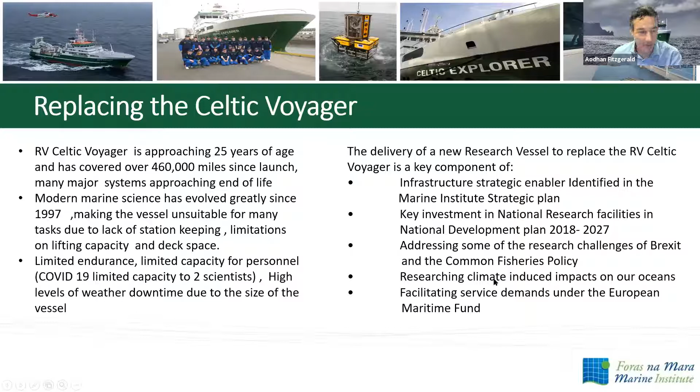So the project timeline. We received confirmation of funding from DAFM, our parent department, in 2018. We ran a procurement process and awarded a design tender to Skipsteknisk Design from Norway in January 2019. Got to work immediately, and we had a basic design completed by the middle of 2019. That helped us issue a tender for the construction of the vessel in 2019. We then began a detailed design process in July 2019, including looking at the energy efficiency aspects. There was a contract for vessel construction awarded to Astilleros Armon in Vigo in December 2019. Equipment procurement and further detailed design work began very early in the new year in 2020.

Steel cutting commenced then in August 2020, and the keel was laid in November 2020, all on track despite the extreme challenges of the pandemic. The vessel is to be launched on the 19th of November, this Friday, in Vigo, 2021, and the vessel delivery is planned for Q3 2022. So we're delighted that the vessel is going to be floating finally on this Friday.

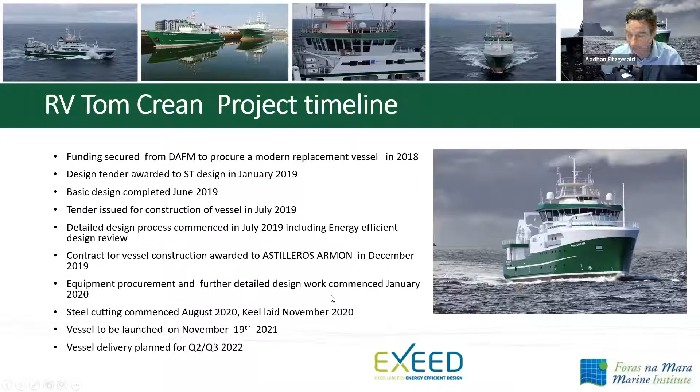So the outline initial design was for a diesel electric vessel with 2 generators, roughly 3 megawatts in capacity, burning ultra low sulfur marine gas oil, 52.8 meters in length. Vessel to be designed to meet the requirements of the ICES 209 curve for underwater radiated noise. Accommodation for 12 crew and 14 scientists, with an endurance of 21 days and capabilities in the areas of fisheries research, oceanography, hydrography, geology, ROV deployment, and buoy deployment and servicing.

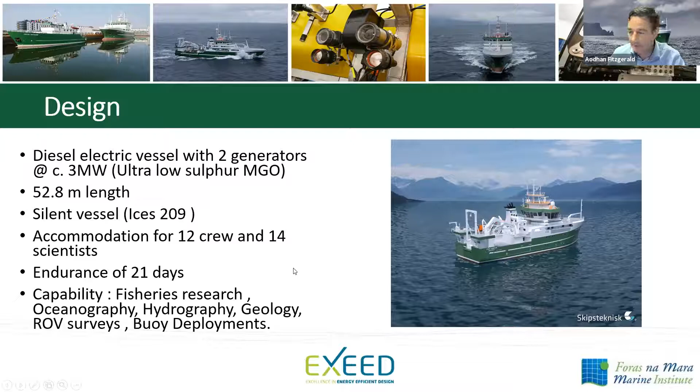So the final design we ended up with, the length overall didn't change. The beam ended up at 14 meters, gross tonnage of just over 1,900 tons. It's classified by Lloyd's. It's got an ice class 1C, which is quite a relatively heavy ice class compared to the previous vessel. It's got DP1, up to 26 people. It's got Mitsubishi high-speed engines. It's got a separate harbour genset. It's obviously one single electric motor driving a single propeller. It's a 7-bladed propeller to help with the silence of the vessel. It's got a 700 odd kilowatt bow thruster as well as a stern thruster.

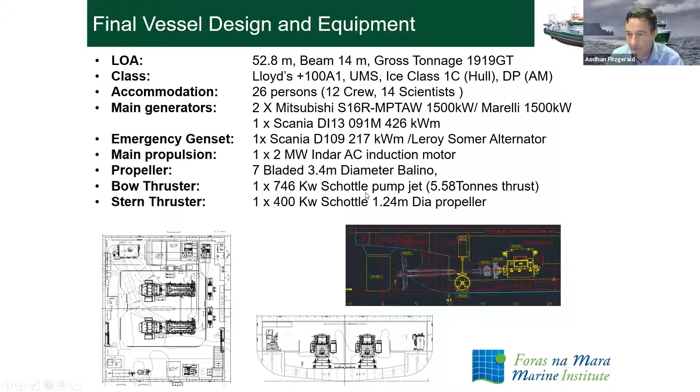In terms of the acoustic surveying equipment, it has two multi-beams at the moment: one dual RX 2040 on a retraction unit forward of the drop keel, with a second backup 2040 on the drop keel. Our experience from the Celtic Explorer is that having a multi-beam 9 meters down on a drop keel gives the ability to work in very high sea states.

There's also provision for a more deep water EM 710 on the hull, just forward of the 2040. There's a sub-bottom profiler, a Knudsen 3.5 and 12 kilohertz unit, hull mounted. There's a fisheries echo sounder on the drop keel with 5 frequencies, an EK80 system. There's a long-range fisheries sonar SU93, an ADCP fitted here, a 45 kilohertz Pinnacle unit, and the ability to fit a 150 kilohertz as well.

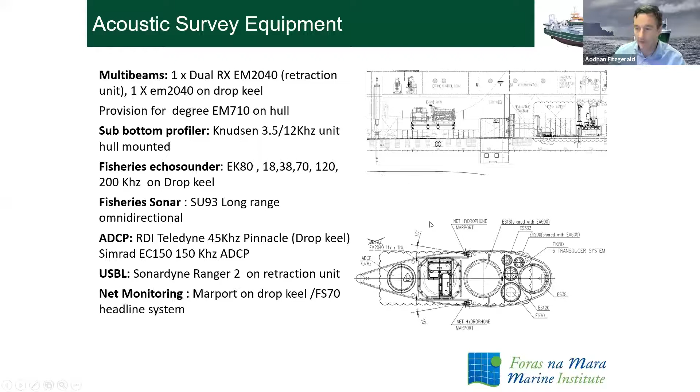It's got a permanent Sonardyne Ranger 2 USBL on a retraction unit just aft of the drop keel, and it's also got net monitoring capabilities using Marport hydrophones in the drop keel.

In terms of oceanographic equipment, we have a 24 bottle CTD unit with 4,000 meters of wire on an active heave compensated winch from a dedicated launch and recovery unit. It's got the usual underway temperature, salinity, PCO2, and other water sampling in the bow, and also has a bow met mast for meteorological work.

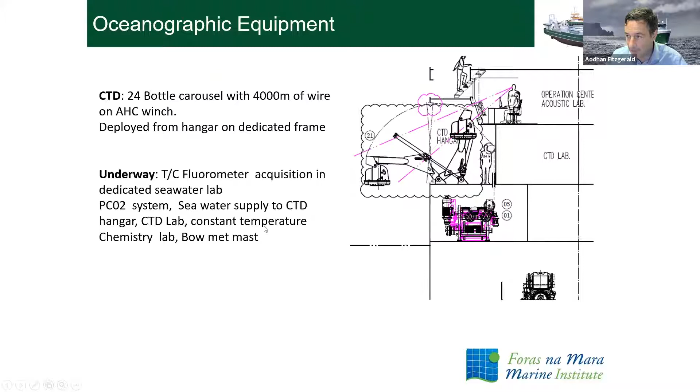In terms of coring and sampling, it has an 8-ton T-frame on the starboard side, which can operate up to 4,000 meters of 14mm Dynex, ideal for piston and gravity coring up to 12 meters in length, and box coring. There's also a hydrographic winch for day grabs and smaller sampling devices.

There's an oceanographic winch with 2,500 meters of coax, multi-purpose for either towing oceanographic equipment, multi-nets, or side scan deployments. It has a 10-ton A-frame, set up for likes of vibrocoring, CPT work, and operating a camera sled. It also has a moving vessel profiler on the port gantry.

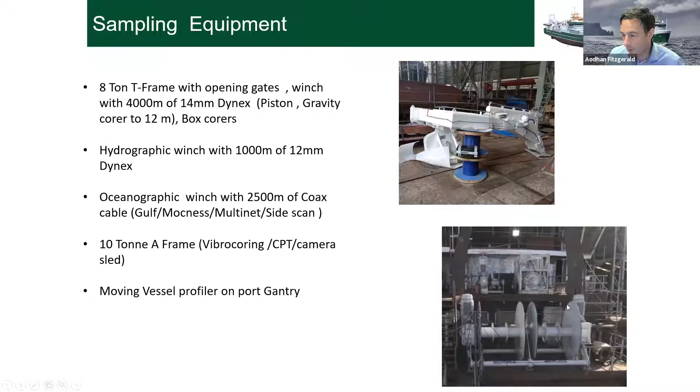So we mentioned it can take up to 14 scientists, equipped with the usual stuff, a gym, which is a big improvement on the Celtic Voyager. It's got good recreational areas, a shore generator for fuel efficiency, and all electric winches.

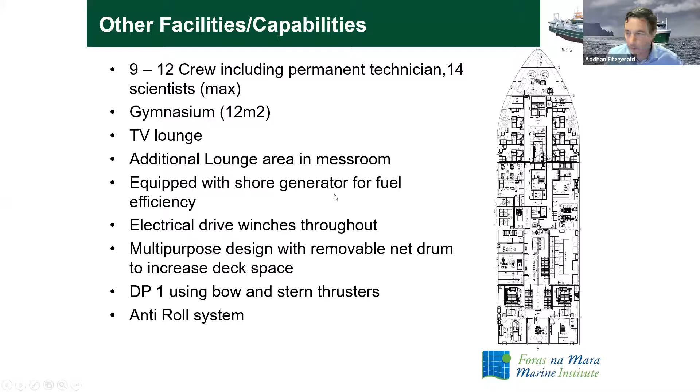It's a multi-purpose design as well, so we can take some items off the main deck when we're changing mode. So it has DP1, using the bow and stern thrusters and the main screw, and it's fitted with an anti-roll system to operate in higher sea states.

There's the general arrangement. So basically on the lower deck we have all the machinery, the diesel generators, electric motors, and auxiliary equipment. Science cabins are on the tween deck, with 12 berths. We have areas like the gym down here, trawl winches down below.

Then we have a mess area, an oceanographic lab, and our fish lab here, with some crew accommodation and messing and galley here.

Mostly crew accommodation on the following deck, and 1 or 2 science cabins, and our operations center. Then there's a bridge trunk that accommodates all the bridge electronics, air conditioning, and other items, followed by the bridge. And then we have a dedicated MMO station on top of the bridge as well.

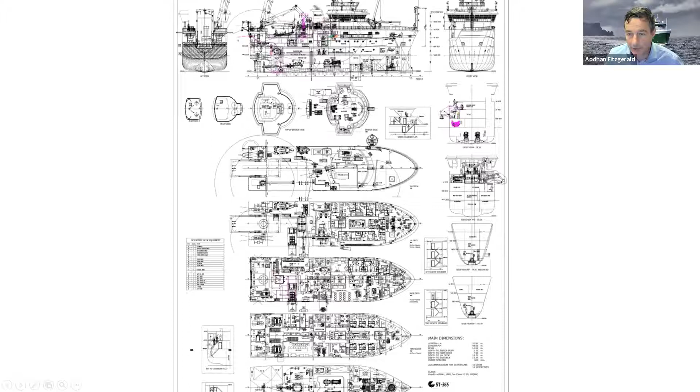All items like doors, hatches, and windows are installed. All the transducers, sub-bottom profiler, multi-beam, and fisheries transducers are all installed. The frames and cranes are just in the process of being fitted when the vessel comes out of the shed.

The wheelhouse was installed in mid-October. Fit out is continuing with piping, cabling, insulation, and paneling. I believe there's over 80 kilometers of cables going on the ship, so there's a fair bit of pulling of cables required. The hull was going to be launched this Friday.

We've completed the first part of the dimensional survey for the subsea, the hull-mounted transducers, and it will follow on with the upper part later after launch. We will start commissioning systems, largely mechanical and ship systems, in February, followed by science systems, and then the science trials are planned for April-May 2022.

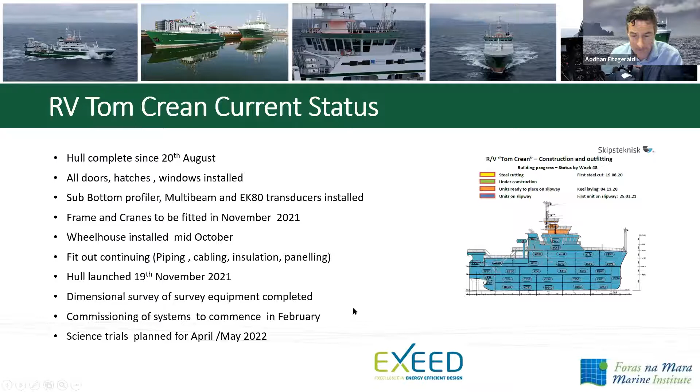Just a quick note on energy efficiency. We took part in the SEAI Exceed program, which is energy efficient design, and we held two challenge and analyze workshops with the vessel designers, and we amended the construction specs somewhat to reflect the output from the workshops. The final vessel construction tender had a few options to allow additional energy saving elements.

We found that the marine sector was a lot more focused on hull efficiency and propulsive efficiency rather than hotel or on-vessel power use. A lot of standard requirements of EU legislation, such as high efficiency motors, are not applied to the shipbuilding sector. So they're still using IE1 motors as opposed to onshore now it's IE3 and upwards.

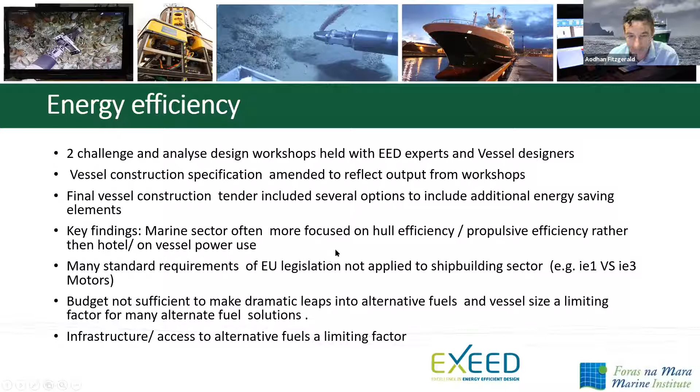Our budget wasn't sufficient to make dramatic leaps into alternative fuels, and the vessel size is a limiting factor for many alternative fuel solutions. The big challenge is that the infrastructure and access to alternative fuels in Ireland is a limiting factor. But we've incorporated several energy saving design options.

We use an advanced silicone elastomer antifoul, which should last up to 10 years with an annual CO2 reduction of 107 tonnes. And we have a 400 kilowatt harbour generator for in port or at anchor use, which should save up to 45 tonnes of CO2 compared to running over the main gensets.

The vessel is designed to use shore power where available, so we can actually use grid electricity when we're in port - that's a 300 kilowatt connection. So we should be able to use renewable energy when we're in port, but we just need to get the ports to provide somewhere for us to plug into.

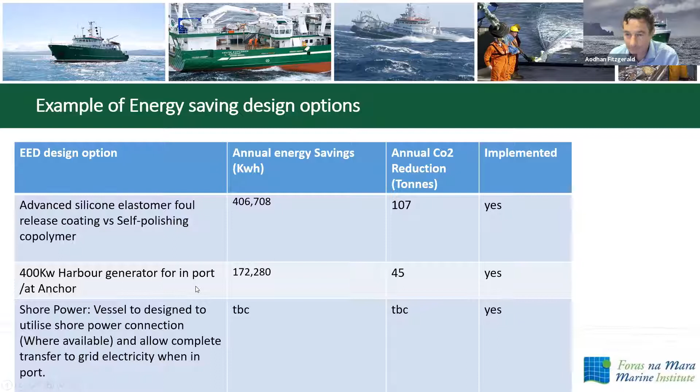So we did look at alternative fuels. Basically, LNG wasn't feasible due to the lack of refueling infrastructure in Ireland, and also the size of the vessel, the requirement for the high pressure tank, and the budget, of course. They say you can reduce up to 25% CO2 with LNG, but the jury is out somewhat on that, with methane slip being another factor.

Methanol or hydrogen - basically the technology wasn't at a required state of readiness, though that's changing now all the time. We looked at hybrid solutions, but the vessel needs an endurance of about 21 days, so it greatly limits the usefulness of a hybrid, other than doing peak shaving to avoid starting a genset.

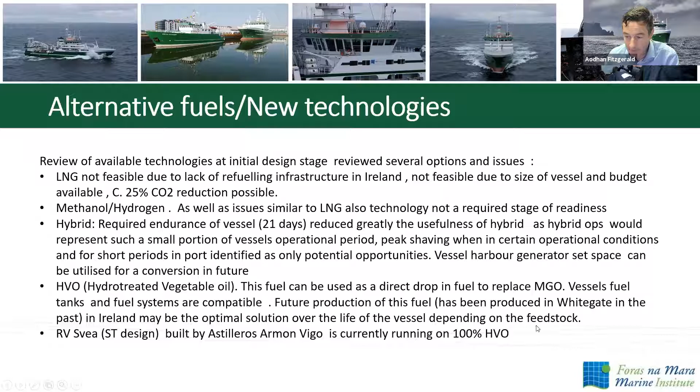We've looked at hydrotreated vegetable oil, or HVO. This fuel can be used as a direct drop-in to replace marine gas oil, so the vessel's fuel tanks, fuel systems, and main engines are compatible. There's more of this coming on stream, so this may be the optimal solution for at least the early part of the vessel's life. The yard built a previous vessel for Sweden, the RV Svea, and it's currently running on 100% hydrotreated vegetable oil.

So just other clean ship measures: the vessel is being built to IMO Tier 3 limits in terms of emissions. We're using all biodegradable lubricants. The vessel will have a ballast water treatment system compliant with MARPOL, and we made one side of the vessel for clean water intakes for science and the port side for discharges.

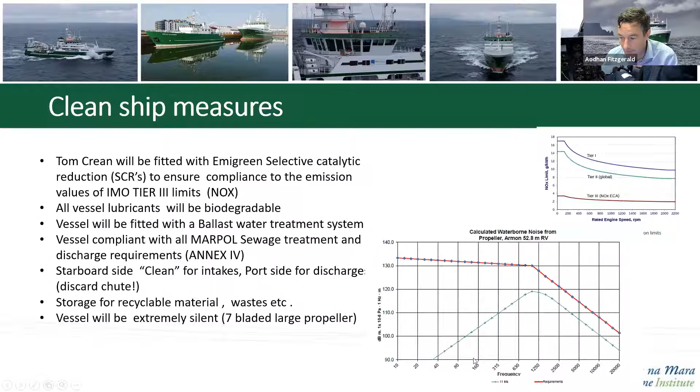The vessel will be extremely silent with its 7-bladed, very large propeller. So here's the projected noise performance of the vessel.

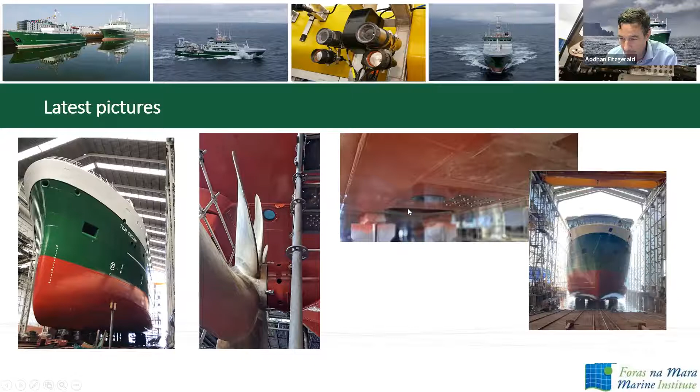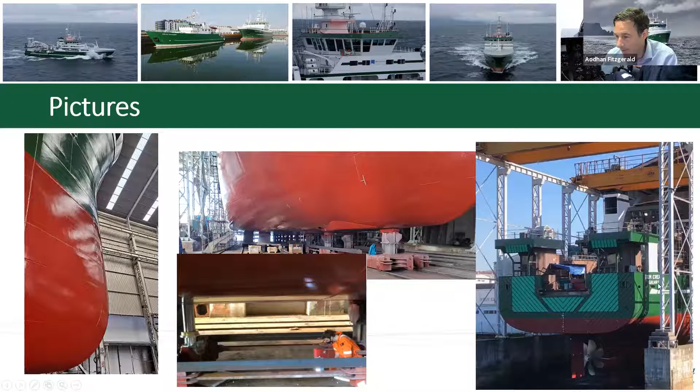So you can see the anti-foul that has been applied. Here's the EM 2040 or transducer unit being surveyed in by the surveyor. And you can see the 7-bladed prop again with the vessel ready to go there. So it will be launched back into the water here on Friday.

It doesn't have a bulbous bow, to increase the acoustic performance. It actually has what we'd say a large volume bow, to give you the buoyancy that a bulbous bow would give you, but without creating the bubbles, which can have an adverse effect on the acoustic transducers.

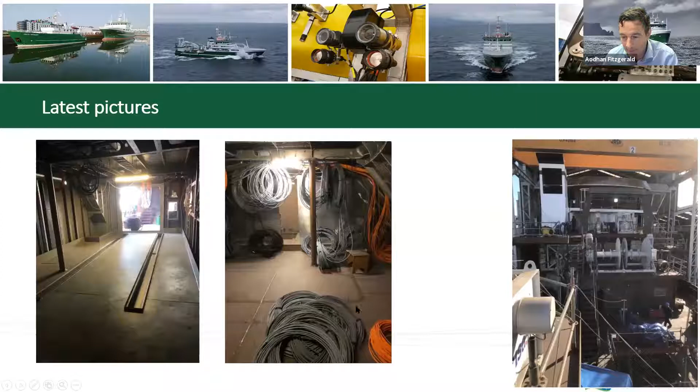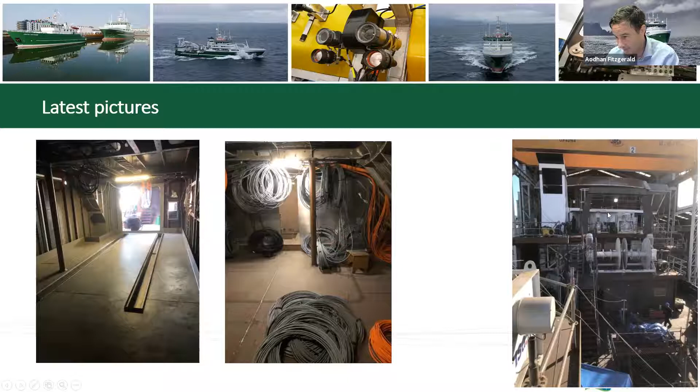Here's just some more pictures of the interior - that's the fish lab. Here's a very small amount of the cabling that's going in. Here's a view from the upper port gantry - you can see down onto the main deck here. There's a fairly wide side deck, and very good line of sight from the bridge for coring and other operations.

There's our winch with 4,000 meters of Dynex for the deep water work. So that's it in the yard there now. That's the CTD doors here.

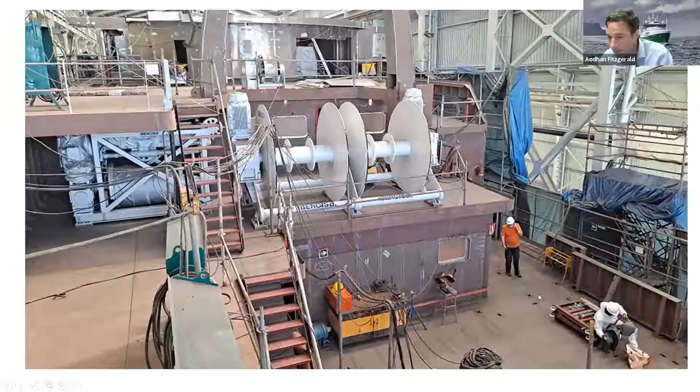Yeah, so that's the progress at the moment. Another view looking down on the deck. All the winches are electric, provided by Ibercisa, a company from Vigo. And that's it.